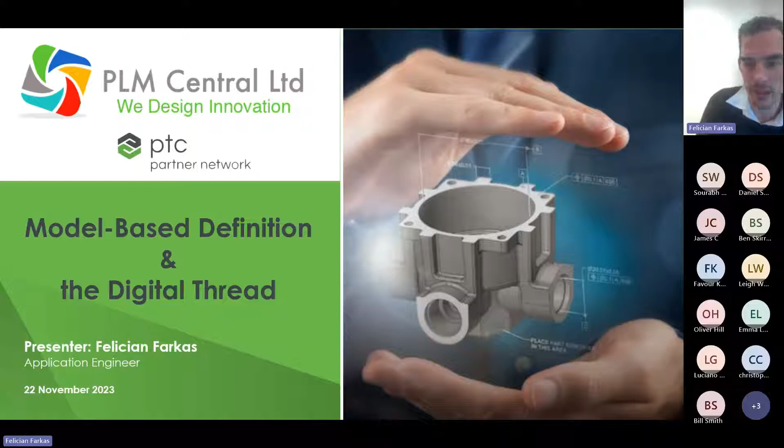Okay, so let's start reviewing the webinar agenda. Stefan has introduced you to PLM Central. The main focus today is MBD and digital thread.

What is MBD? The main component of MBD and the attached product manufacturing information. What does MBD look like in a product life cycle, and how different organizations and stakeholders extract information from the CAD model. 3D CAD model annotation and combination stage. Also going to mention MBD in manufacturing, machining and tooling.

Talk a little bit about digital thread as well. And at the end, I'm going to talk a little bit about Creo tools and how they can help MBD.

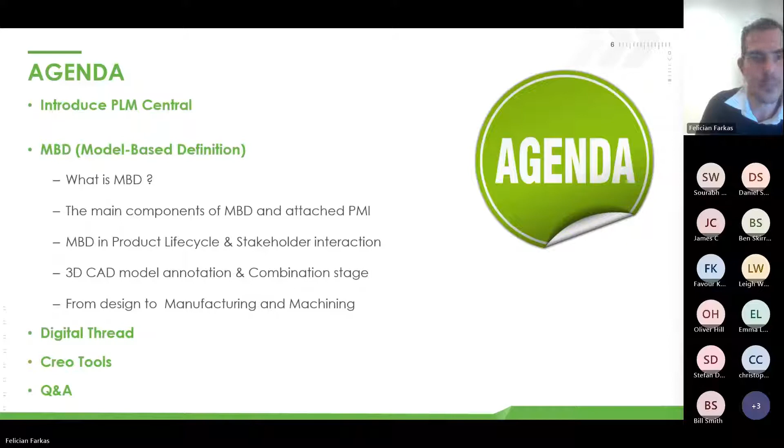So global competition and growing product complexity demands a smooth flow of relevant information for efficient processing. In a manufacturing industry, the main information source is attached to the CAD model. How the information is extracted and shared from the model during the product lifecycle stage is key.

Creo parametric model associativity and excellent windchill integration provides direct and real-time product modification and steady, well-managed file format transfer. It also supports automatic notification along the process.

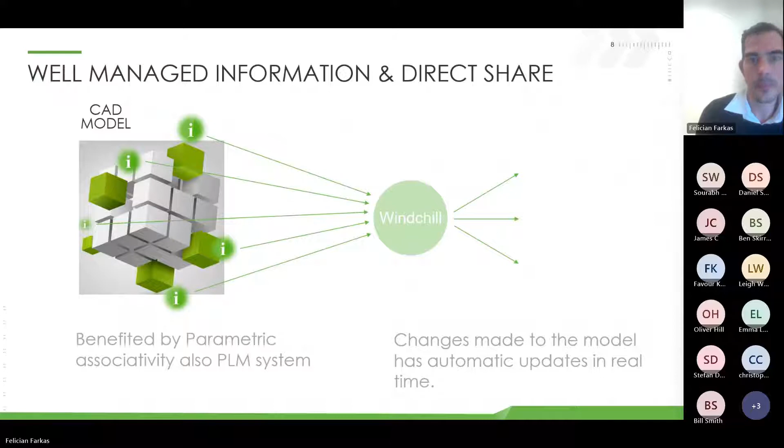So model-based definition is a methodology in product development where the CAD model is the embedded information and center of MBD. The 2D model is replaced by a more visual annotated 3D digital model. The MBD is often mentioned as a single source of truth.

This technology becomes a very powerful asset, not only in the early product lifecycle stage, but also in the product manufacturing stage, referencing information in a later life cycle and highlighting just the necessary information.

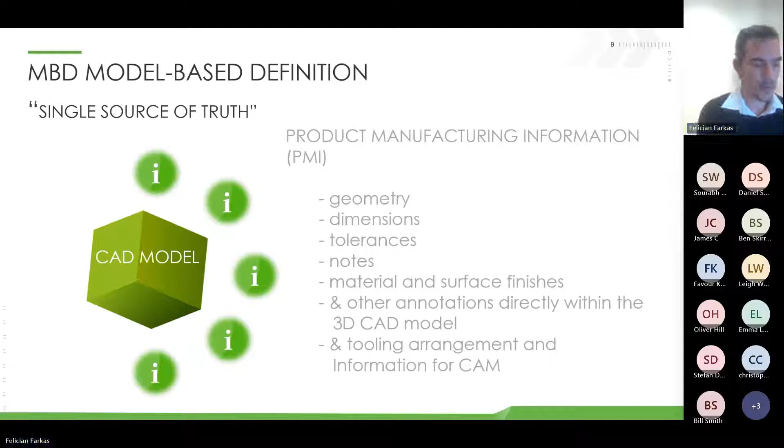The main component of MBD is the 3D CAD model. What does it contain? Product manufacturing information, PMI, and metadata. PMI includes dimensioning, annotation, and symbols, GD&T - geometric dimension and tolerance, notes, assembly information, and more.

Metadata includes details such as part name and features, along with specific properties associated with each feature. The bill of material serves to organize and manage the list of components and the quantities. And metadata maintains revision history as well.

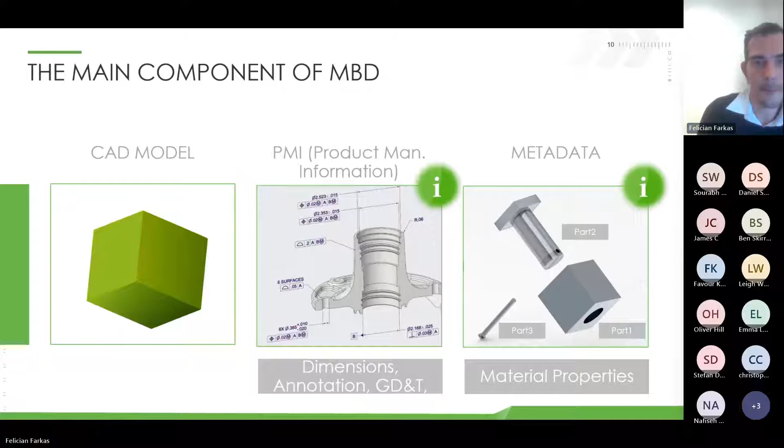The Creo software family's diverse range of tools and windchill integration seamlessly facilitates state transformation across different stages of the product lifecycle. This integration represents a significant strength of PTC, particularly when employing model-based definition.

MBD and the digital thread facilitate collaboration with in-house departments, help communication and share data between other stakeholders and suppliers, and automatically generate reports in each individual life cycle.

So you can see the first bit is the product development, the CAD design stage, where the model is created and the product manufacturing information attached to the model. And that's the key and very important stage for the whole entire model-based definition.

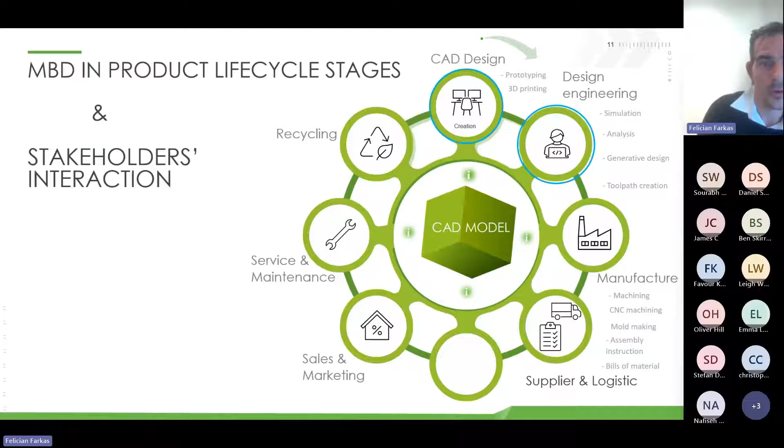The next stage is service and maintenance; we'll mention this in later slides. And at the very end, the recycling stage. MBD supports proper disassembly instructions, gives information on the material content, and instructions on how the product needs to be disposed of correctly. And this is all attached to the same model, containing this information, and that's the important bit of MBD. I haven't mentioned all the stakeholders and stages here, but all these stages have their challenges and dependencies, and that's why design associativity is crucial to working with a coherent and relevant real-time model along with the whole entire life cycle.

So in this short video, I'm going to show you how to create some annotations and organize them, and also create different combination states to support MBD, and set up a PMI, product manufacturing information. Annotation is important to help MBD. MBD shows annotation on the model and its associated data elements to define the model. So that's the most important thing about MBD. In this example, I will show you a sheet metal model. So let's start the video.

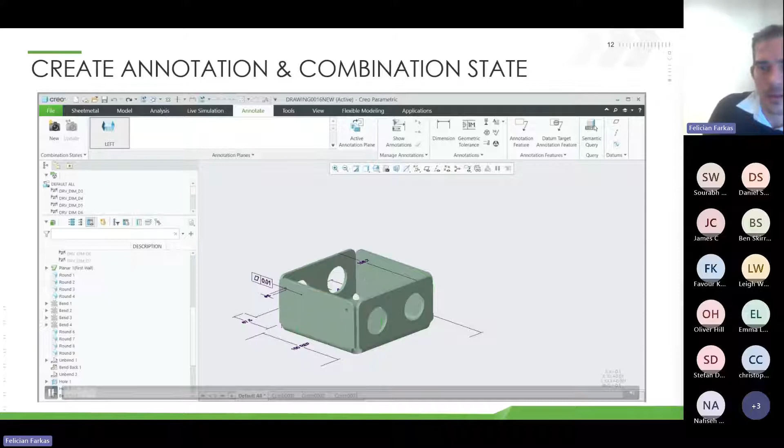At the beginning, no annotation shows on this video, so I make it visible and select an appropriate plane, the left plane. So the annotation will be parallel with the surface, and a new annotation will be added showing that dimension, the hole size dimension. When an annotation is created, we can assign it to different combination states.

Now we add a new annotation, geometric dimension and tolerance. Again, select the appropriate plane. We can select the characteristic of the geometric tolerance, and we add some datum targets here.

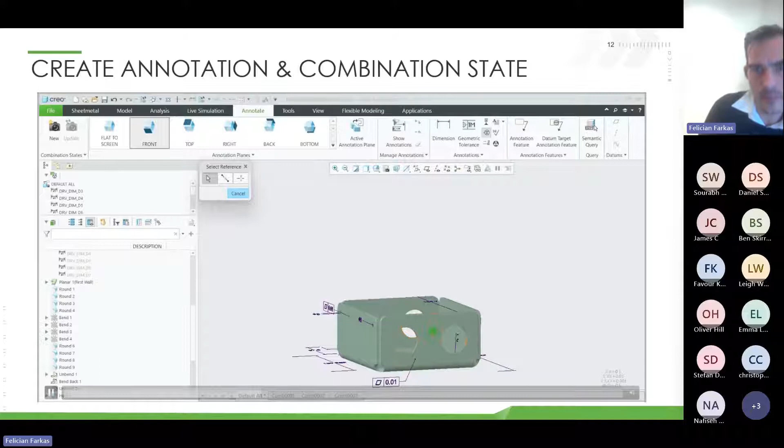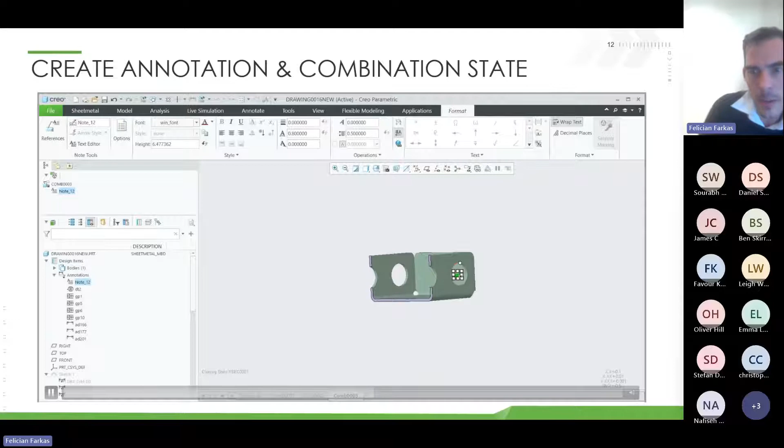These annotations are all added to the general combination state at the moment, not assigned to any specific state. So now I will show different combination states. See those little tabs at the bottom of the model. You can see all combination states show different orientation and annotation. The last one is the section view, what you see - a section view orientation with a note on the left.

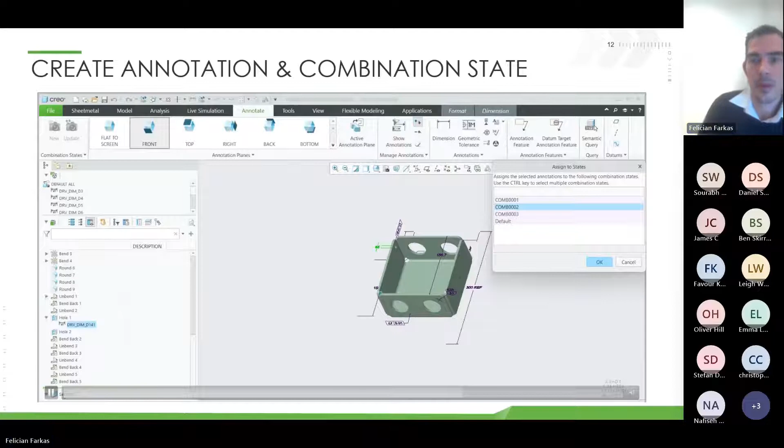We can add new annotation at any time, depending on what we want to display. Combination states and these elements can be created for specific requests, what we want to see. This could be helpful in the manufacturing stage to add a specific reference, group different hole sizes, make notes, warnings of dangers, or any other notes. So these are some annotations assigned to different combination states.

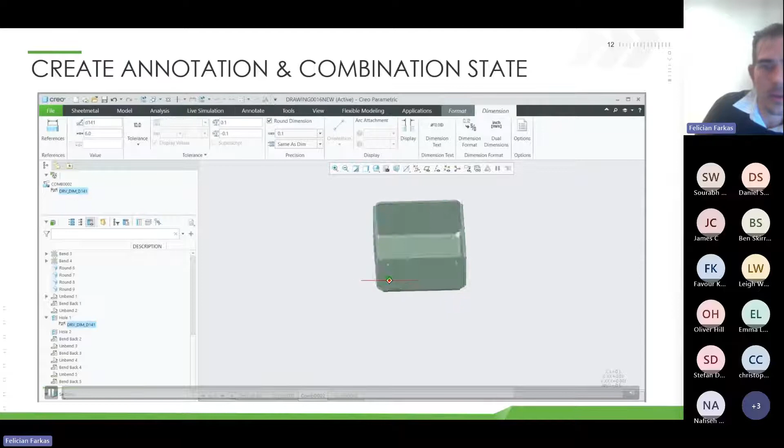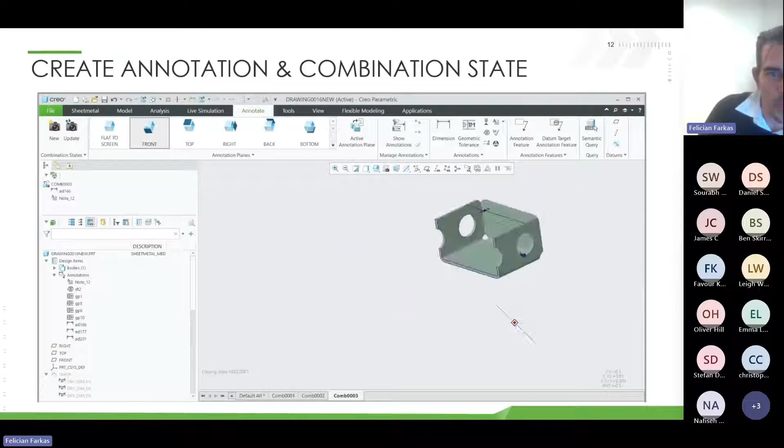The video demonstrates how we assign an annotation from the default combination state to any other state. So you can see this section view shows a top measurement, and then we add it from the general combination state, as you see, and it will be visible on the section view. The 156 value will appear now as I'm going to turn - you can see there.

We can create this combination state either from the view manager, from the graphic toolbar, or from new annotate, new from the ribbon. So again, creating a combination state is to organize display views of the model. It can be a saved orientation or cross section, it can even be an exploding view or assembly view. Also, we can use combination state to organize the 3D annotation, as I showed you, in groups or name them.

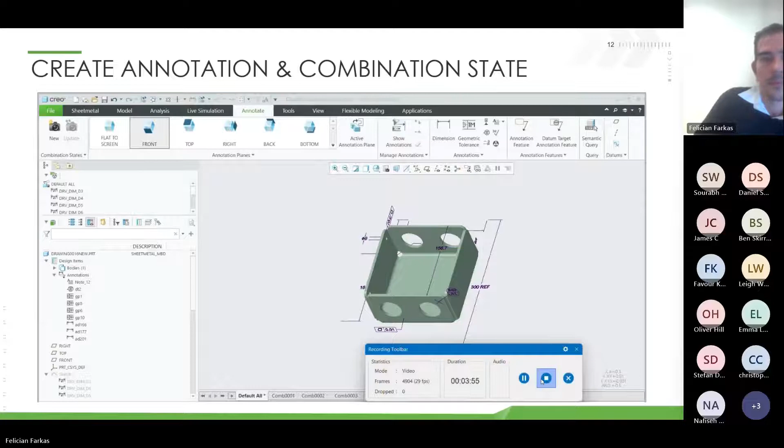Let's go to the next slide. So these slides give you a brief overview of the product development process from the design stage, and also reflect on manufacturing and machining part of the production through an example.

The first few images on these slides show a CAD model creation of a single box. You can see a sketch, a feature model, and a technical drawing. The common practice is to create technical drawings for manufacturing instruction, and that process is about to change with MBD by providing a more organized, visualized, annotated 3D model with intricate instruction and guidance.

Then, on the next pictures, you can see the CNC machine and how the sheet material is cut into a 2D shape. Also, we'll make some score lines for later bending. Third, on the next pictures, you can see the heat bending process, the manufacturing process, where the actual piece cut out is bent at the score lines and formed into the final 3D product.

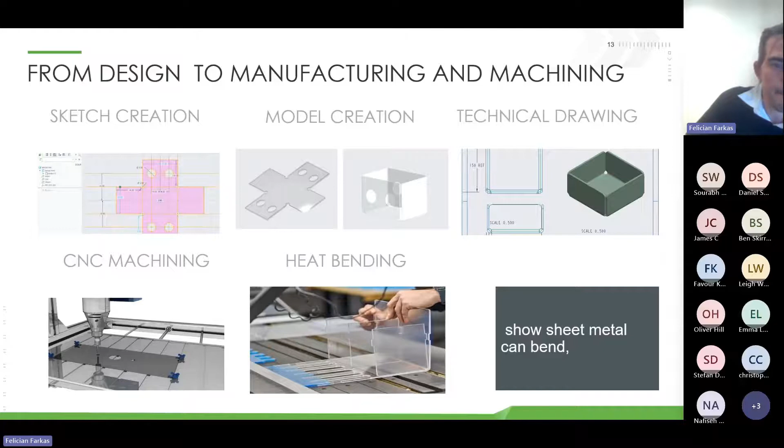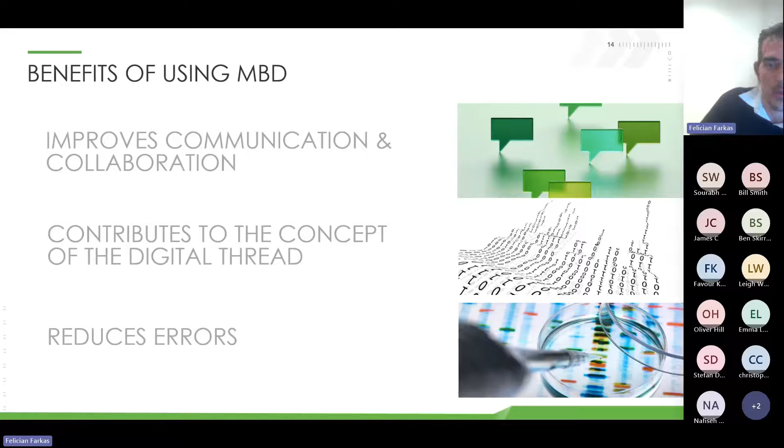Reduce errors by using noted annotation, 3D visuals, as I mentioned, the toolpath, run analysis and simulation all reduce errors. Also streamline the design process, reduce manufacturing times, as I mentioned, and support...

Recycling and eco-friendly solutions. For example, using 3D modeling, MBD means no more paper drawings. So it's encouraging paperless design and reducing paper waste and reducing waste.

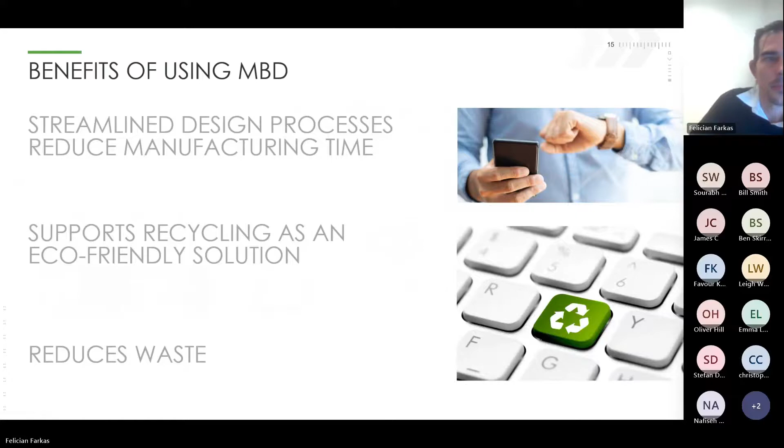So digital thread interacts with the digital content overlaid into a physical world. MBD is a critical component for digital thread, and that's the source of the product information used during the product lifecycle.

Here are 3 examples of how modern age changes allow us to change things, and we would like to bridge these problems with MBD, provided information, and the digital thread.

So quality assurance, visual inspection. PTC has a new step check procedure, and it's helping MBD and AI digital technology. So what does the step check do? It starts with the process of scanning a barcode of the inspected product. Vuforia AR capabilities ensure quality control by recognizing faulty elements and giving guidelines and instructions for the required tasks in the production line, so workers can easily identify and rectify these deviations.

So I would like to put a bit of highlight on Creo tools. As I previously mentioned, PTC has a huge product range in the Creo product line. Technology has revolutionized our whole life. What used to be an hour of Photoshop to crop an image is now a simple click on an iPhone. And there are tools for every one of your production needs, some of which you may not be aware of.

And we make changes continuously. And we have different levels of Creo CAD packages: the Design Essential, Design Advanced, and Advanced Plus, and even more packages to extend your Creo capabilities.

Let's mention some Creo tools. Some of them come with the basic package, and some others need the advanced package. During the webinar, I mentioned CNC machining, which uses the prismatic and multi-surface milling extension, which needs a machining license to create the NC assembly. There is Creo View, geometric dimensioning and tolerancing, PTC MathCAD, advanced assembly instruction, mold design, and mold analysis.